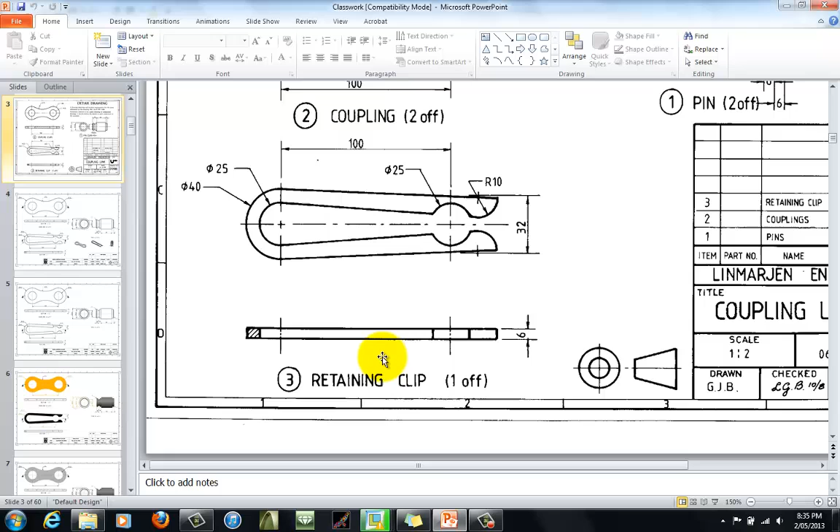In this lesson we're going to be taking the parts that you've been modelling, being the coupling, the retaining clip, and the pin, and we're going to learn how to assemble them together to create the actual coupling link.

The first thing to do is make sure you have all these parts in the one folder, and then we're going to create an assembly within that folder as well. So set your working directory to make sure it's the same folder you have these parts saved in.

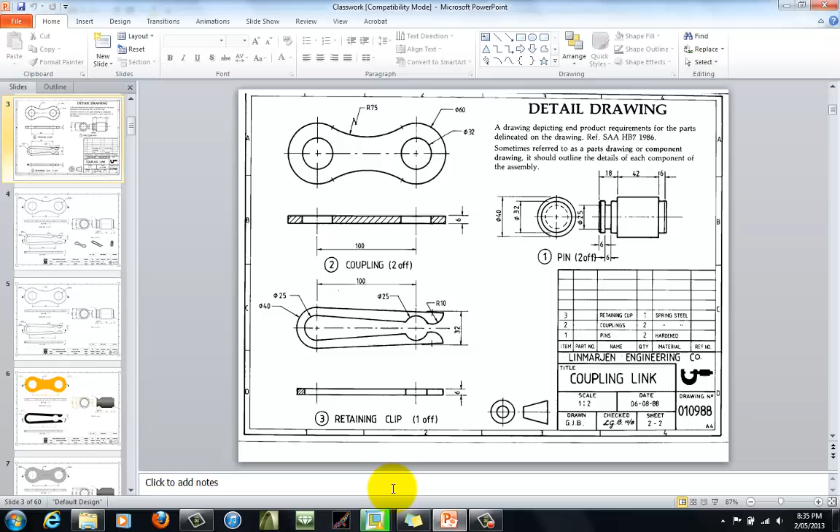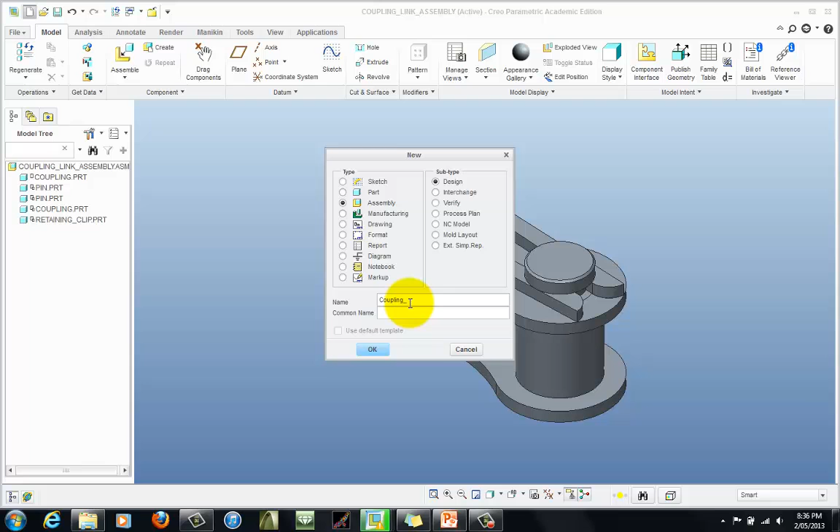Good file management. Okay, across to Creo, and you can see here's a finished one. So we'll create a new one, File, New. This time, rather than clicking on Part, we're going to click on Assembly. I'm going to name the assembly coupling underscore link. It's a link in a chain.

Okay, and we've got a blank page. I might just turn my planes on so I can see them. Now before we bring anything in, I just want to show you this.

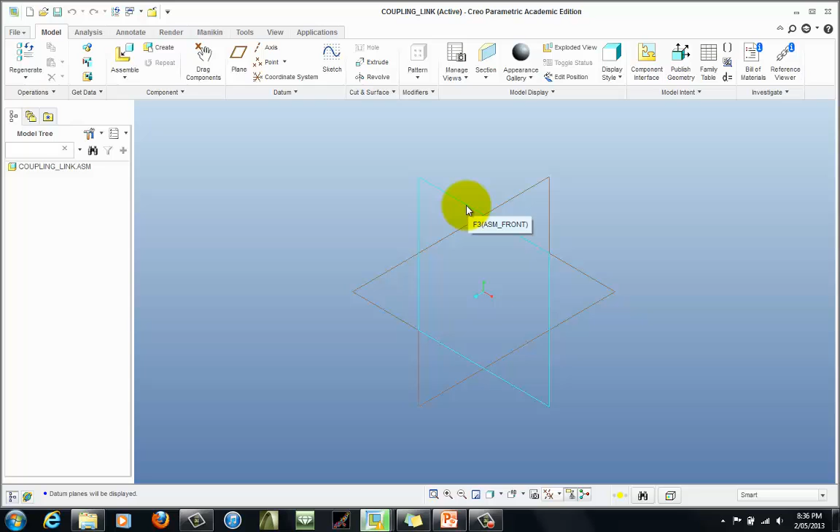If I hover over here, you'll see it's called the front plane. It's important that we realise that when we bring our first object into the assembly, we need to ensure that the object remains parallel with these planes. If that's the front plane, that's the plane I'm going to be looking through for the front view of my drawing. It's important to make sure the object remains at 90 degrees to it, otherwise we won't see the true shape of it.

Either way, let's go to the Assemble tab up here. Let's go Find - first of all, let's insert the coupling. Now you can see I've brought this coupling in, but it's not orientated in the correct position. I don't want the object sitting down on its edge. So what I need to do is rotate this coupling link around.

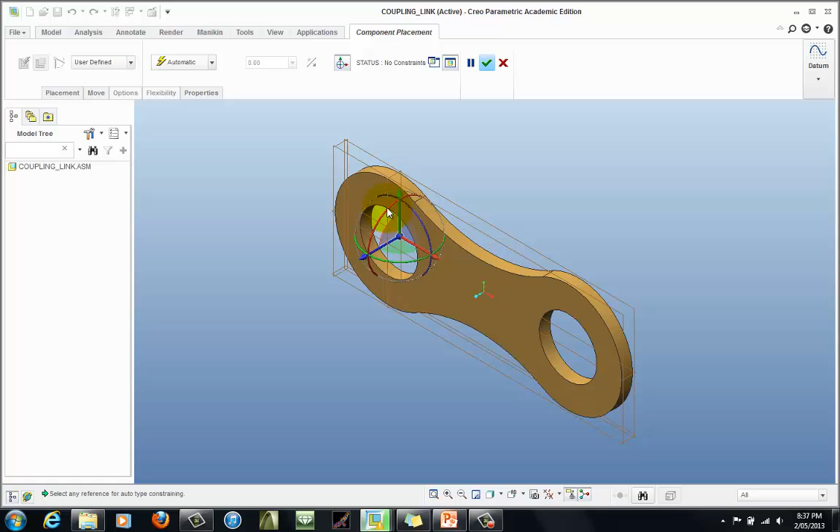Now you see here we've got this dynamic ball looking thing, and when the colours on all these edges and control handles are coloured, it means we can use them to move things around. So the first thing I'm doing is grabbing this red one here. I'm simply going to twist it almost 90 degrees. There's no guarantee that's exactly 90 degrees, and there's no way of really controlling that with these move handles, so I'm just going to do it approximately.

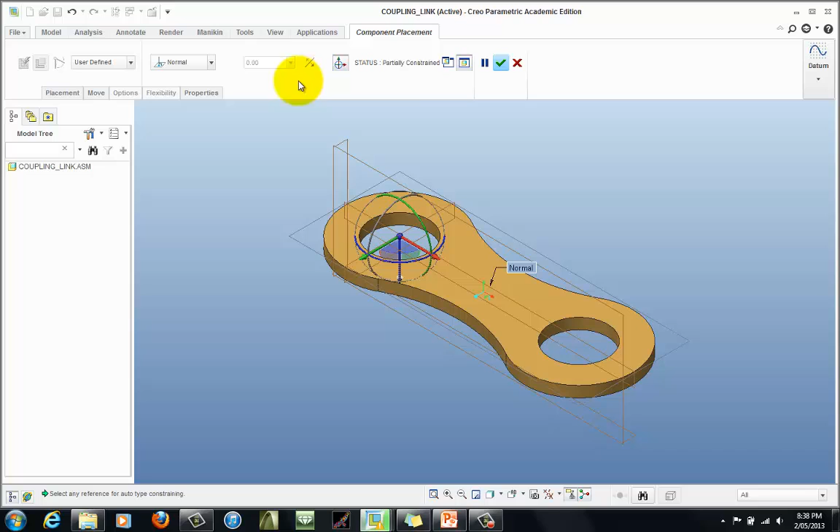But then up here it says at the moment there are no constraints applied to fixing this object in place. So what I want to make sure here is this top face of my coupling - if I select it, and I've got my planes turned on, I'm going to select the front assembly plane. You can see it highlights there, front. So I select that one, and straight away it's changed from automatic to partially constrained, and it says it is at a normal. Now what normal means in graphics speak is 90 degrees - this face I just selected now has a constraint to be at 90 degrees to that plane.

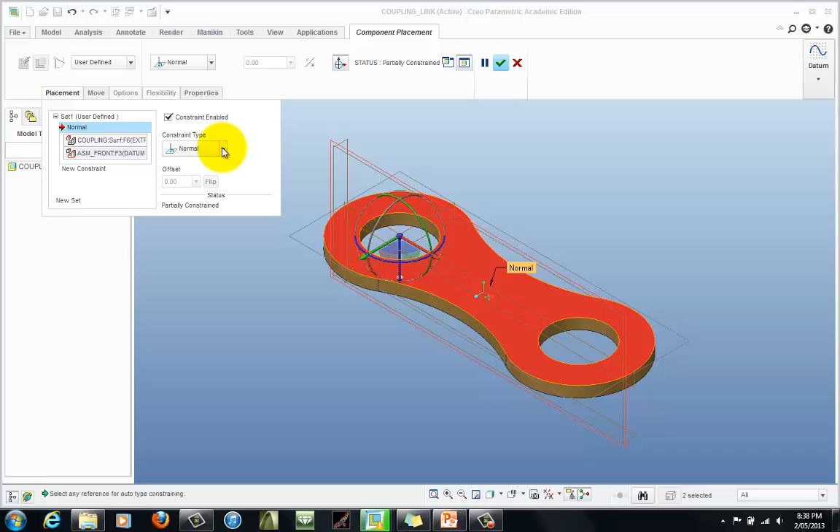We can see that in detail if we open up the placement tab. This is the first constraint, called normal, and there's our two planes, 1 and 2, that we selected to be at a normal. You can of course select other ones like coincident, which makes them parallel with each other, angled, parallel, and so on - but we want ours to be normal.

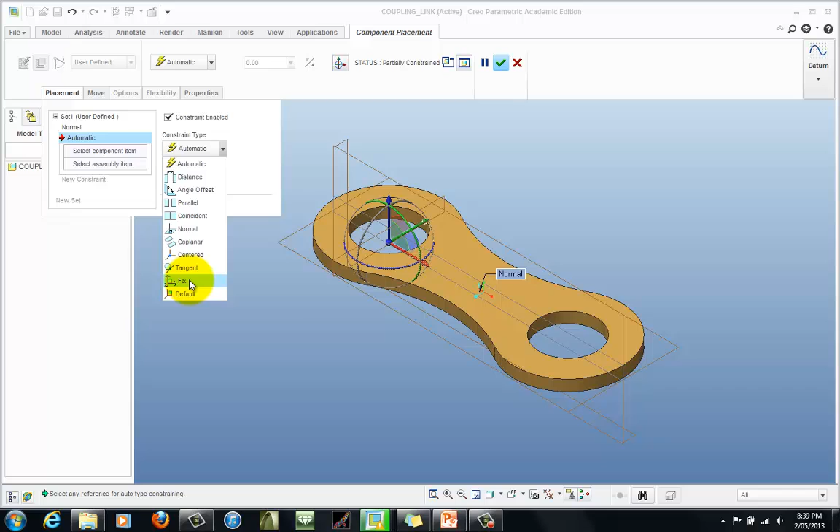At this point it says it's partially constrained. While the object's partially constrained, these drag handles will appear. So what I'm going to do now is click New Constraint on the Placement tab, then choose Fix Constraint, which means the whole object is fixed in space. You'll notice it's now changed to fully constrained - our handles disappeared, which means it's now got enough points of reference so it will not move away from this current position. Okay, let's click OK.

First one's brought in. Now after you've brought your first piece in, there's probably no need to have those planes on, so I'll just turn them off.

And then we can start assembling the rest of it. So of course the next thing to bring in would be the pins. Click on Assemble, click on Pin.

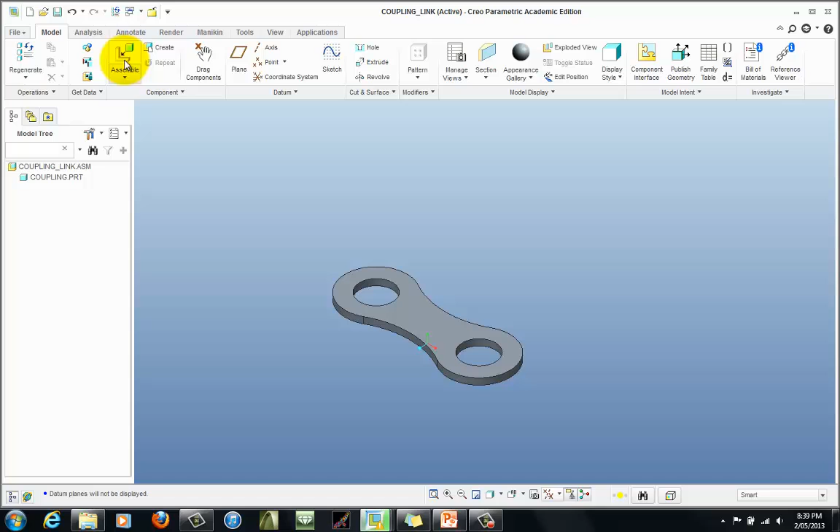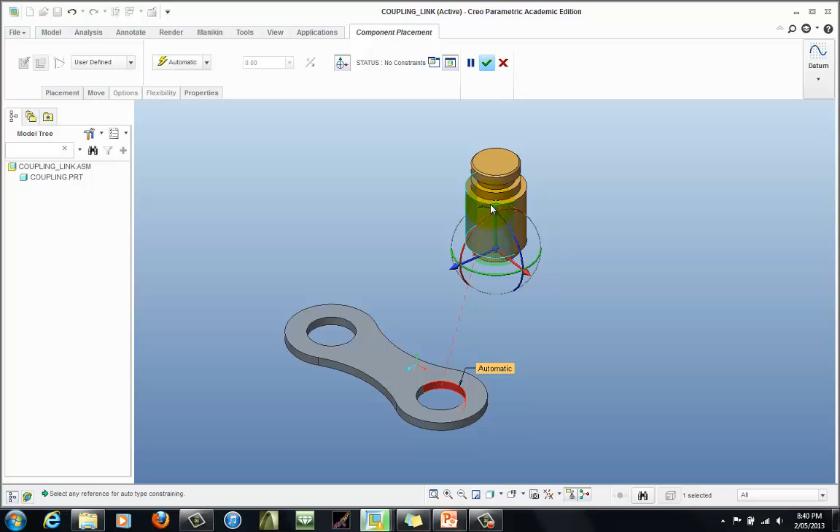I like to use these axes here. You can also use the center ball in the center, and of course here's your options to spin and what have you. So generally when I see something cylindrical, I'll always go for a cylindrical surface that it needs to, we used to say, center axes with. So I'm going to choose this inside cylindrical surface here, and then I can choose any of these cylindrical surfaces because it doesn't work on the actual surface there, it's working off an axis. So even that one will do.

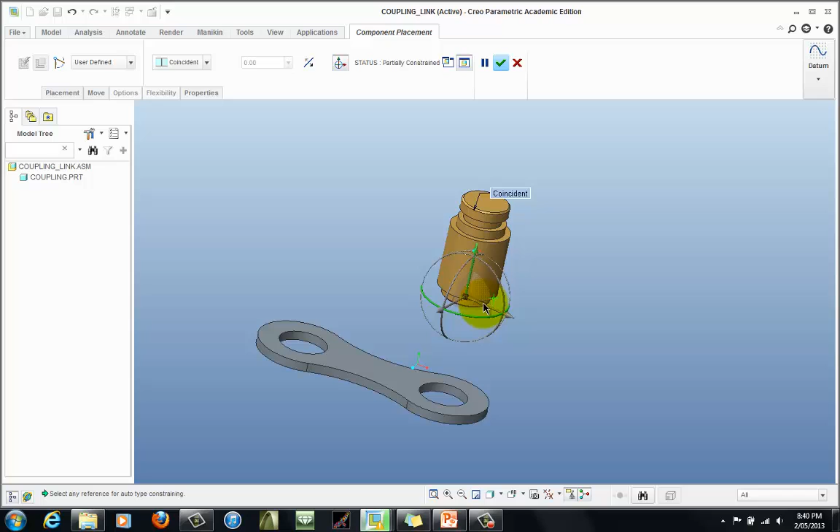Now if we have a look, if we spin it around, you can see it's now centered. And then the last thing to do is I could move this down closer, and you can see that I can't move it left and right because they're greyed out now because it has a centered axis constraint onto it. The only way I can move it is up and down and rotating it around like so.

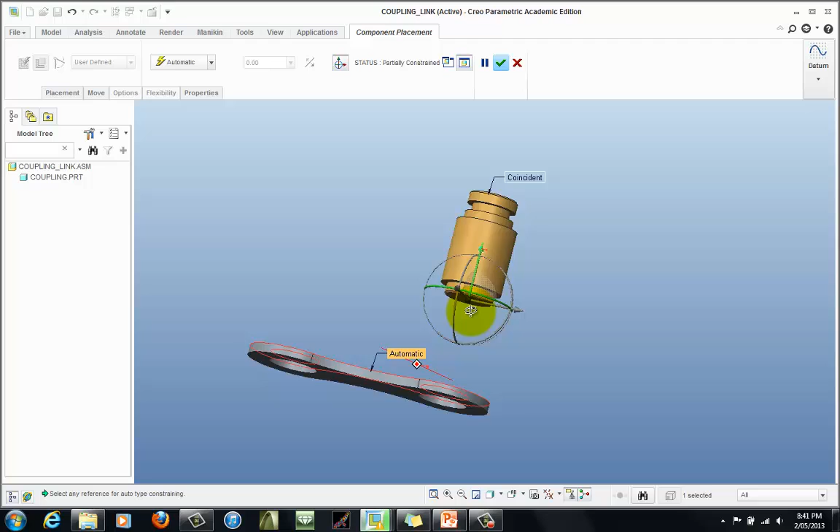The next constraint I can place on just by simply clicking this face here, rotate it around, and then I can just select the surface underneath here like so. You see it's defaulted to distance, so rather than it being distance, we can set up here in our constraints. I've got distance, angle, parallel, coincident. Coincident, you can see the two faces are actually touching each other. Click on coincident, and then therefore we have that held in place.

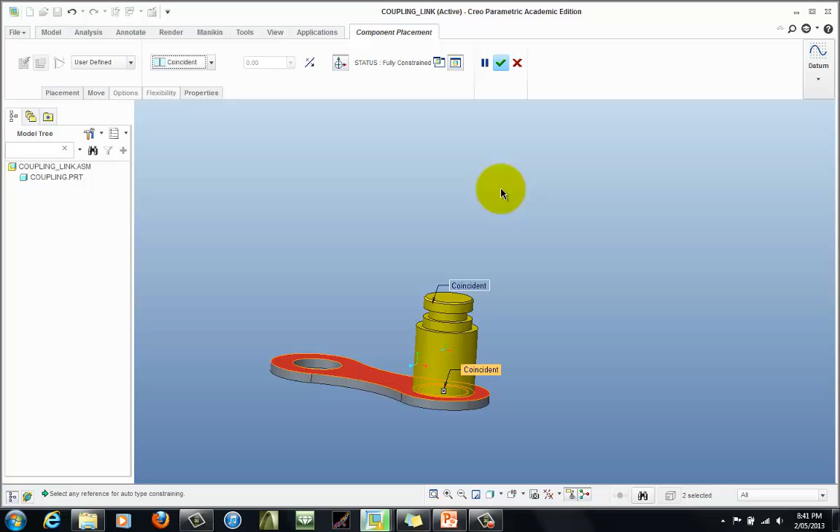Fully constrained, our ball's disappeared, click the tick button, and repeat that same process for the next one. Assemble, pin, move it roughly to the right position, cylinder to cylinder, face to face, and change it from distance to coincident.

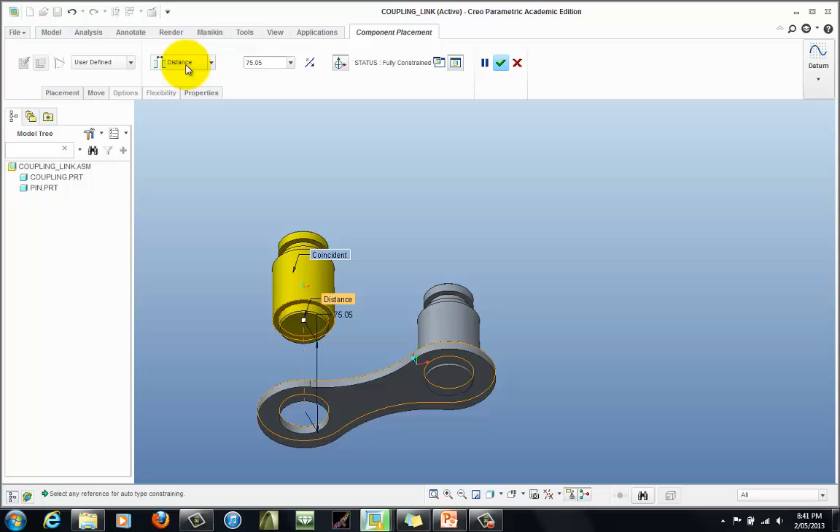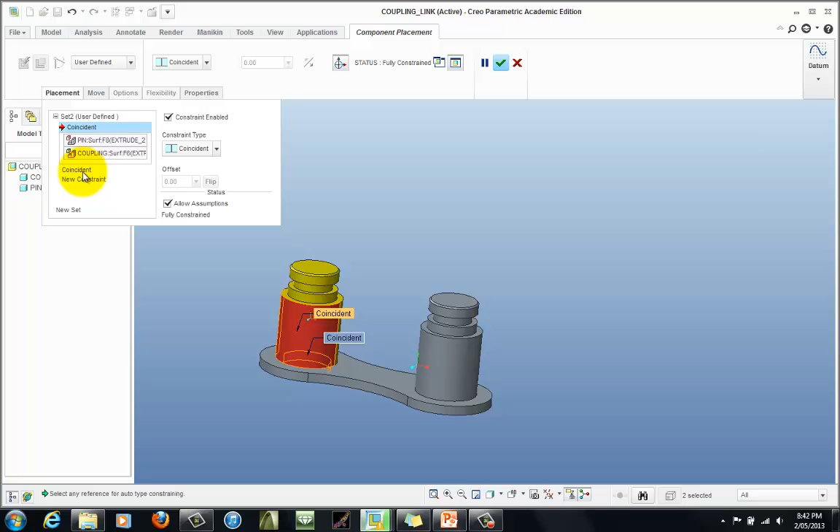Pretty simple. Now if you do happen to make a mistake, you can go back and edit things here by clicking on the placement tab. You can see there's my first constraint, there's my second constraint, and you can change the different surfaces, and you can delete constraints as well. But we can see it's got the constraints in the right position, so I'm going to click the green button.

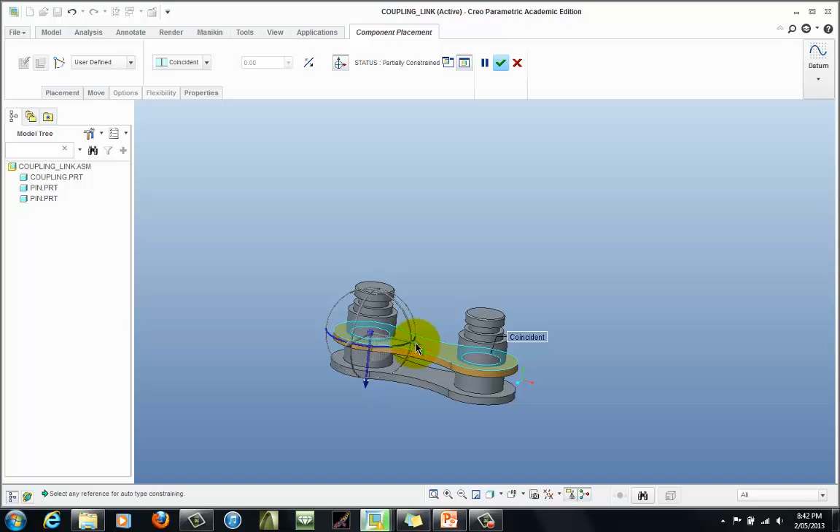Second last thing, I'll bring another piece of coupling in. And this time I'm not going to spin it, I'm just going to choose this inside of the cylinder here. Doesn't matter, it can be any of these cylindrical surfaces because they'll have the same center. Use my move tool, bring it up. And most of the time the computer's smart enough to work out that this part and this part are actually going to join, but I'm just going to make sure.

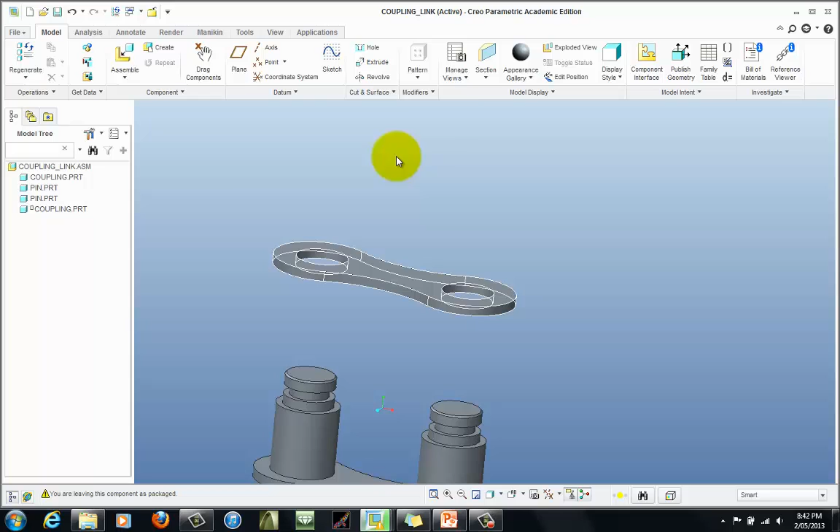So I'm going to zoom in here and select that cylinder, and then lastly, oops, I accidentally hit the center mouse button then. Okay, and you can see here, I accidentally hit the center mouse button which completed it, but the coupling, that second coupling I brought in over the model tree over here, has got a little square beside it. The little square means that it's not fully constrained. So what I'll do is I'll just right click on that, left click, right click, edit definition, and I can finish it off the constraints.

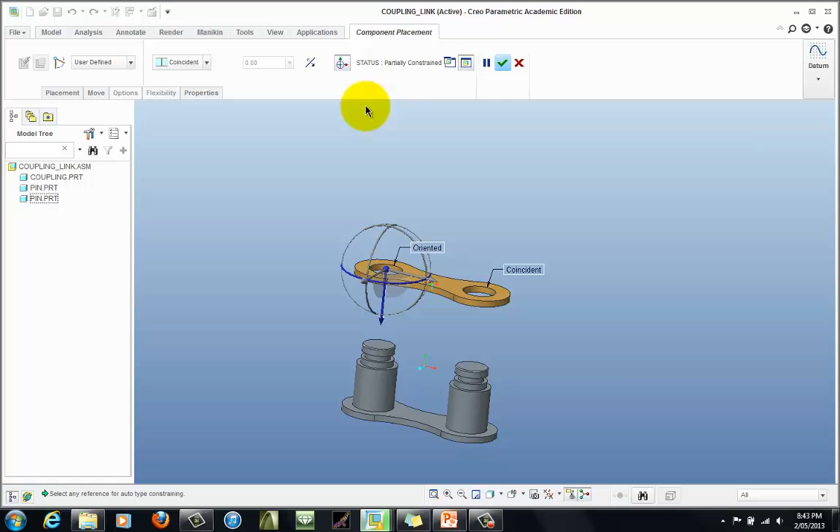So I'll just spin him around, that surface there, that needs to join or mate with that one there. Not at distance, once again change it to coincident. Fully constrained and tick. Looking good, one part to go, being the retaining clip.

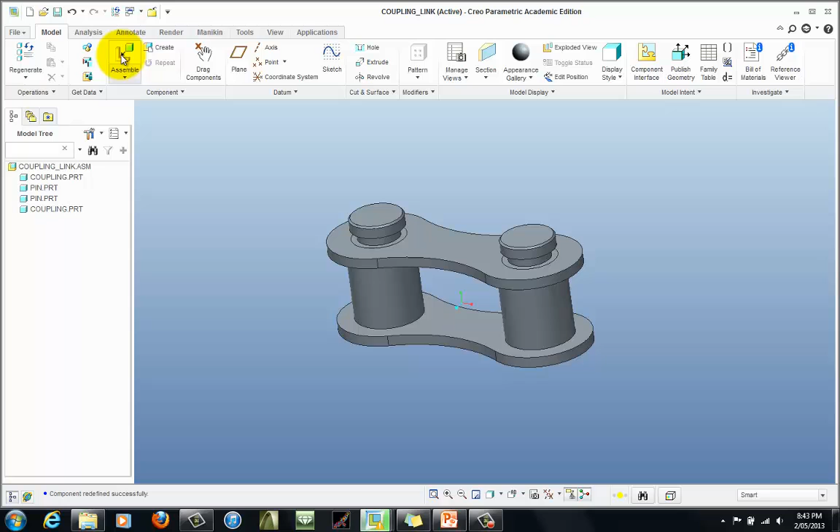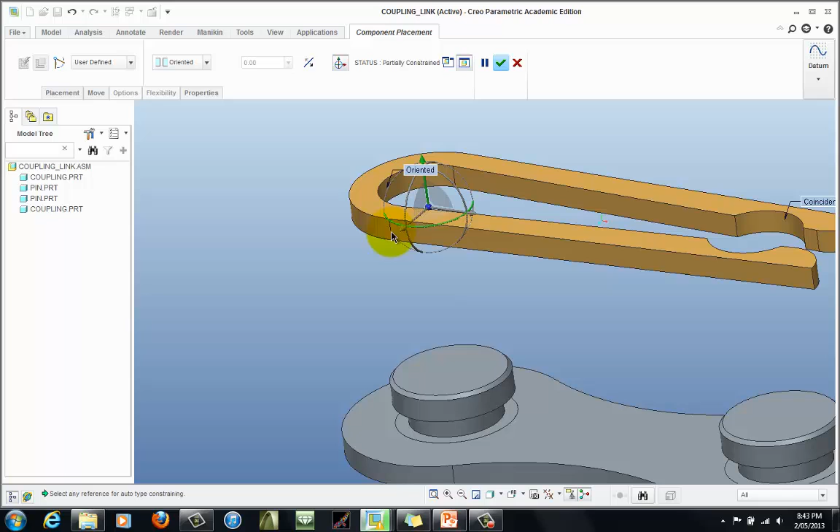Similar process: inside of a cylindrical surface to another cylindrical surface. You can see the object's disappeared inside here, so these handles are quite handy. Just going to check this other one at the other end, make sure it is constrained. And then lastly, we want the bottom of that retaining clip to go on top of the coupling here. One and two, and it's guessed coincident this time, which is correct, and tick OK.

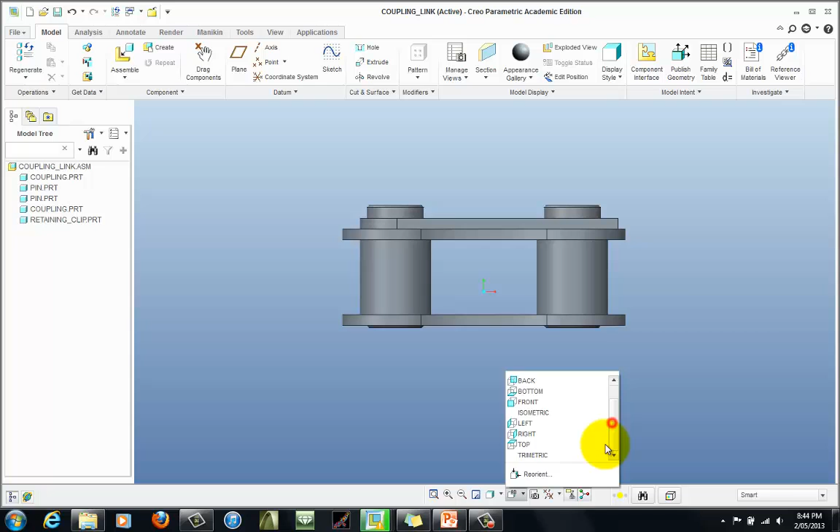Down the bottom here with our preset views, we'll just click on isometric, and if we've done everything correctly, if I click on front view here, we should see ourselves looking in at 90 degrees. Obviously you can choose left, right and top and so on, and we have correct alignment. Okay, now you're ready to render and start creating some drawings.